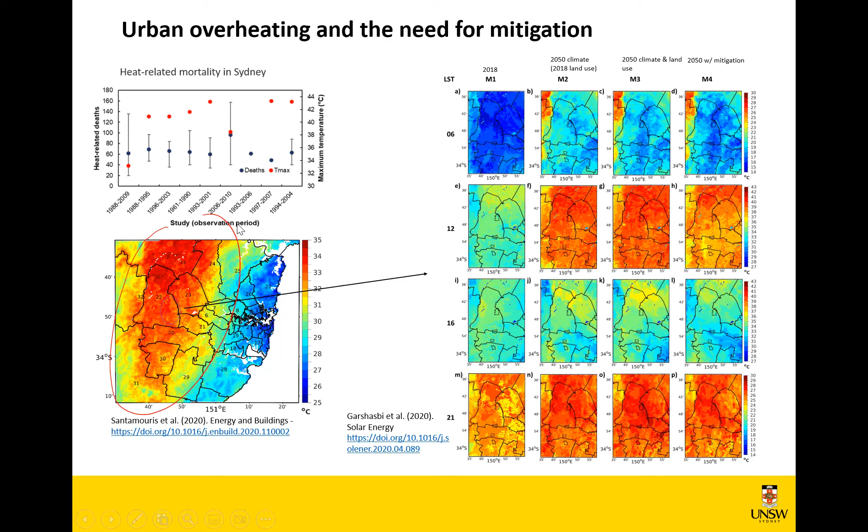So, for instance, in Sydney, in the Western Sydney area, and in the long run, we will have increasing nighttime temperatures as well, even in Australian cities. So we need to address this problem and find and implement a solution.

A lot of science has been developed, as we saw in previous webinars, so now we have to put it in place. We're all familiar with the building energy performance gap: we think a building will be zero energy or will have a low energy consumption, and there's a sharp difference between expectation and reality. We have a very low predicted energy consumption, but then the real energy consumption is much higher.

Why? Because of geometry, because of physical properties, because of the user's behavior, because of how we represent the physical processes, whether we produce the prediction with an unsuited model. A lot has been done in that realm, and we have a lot of information from post-occupancy evaluations in buildings.

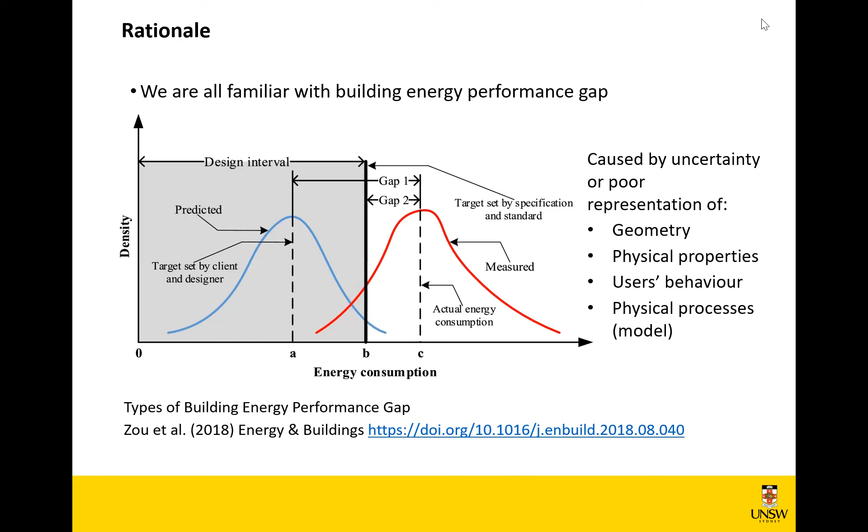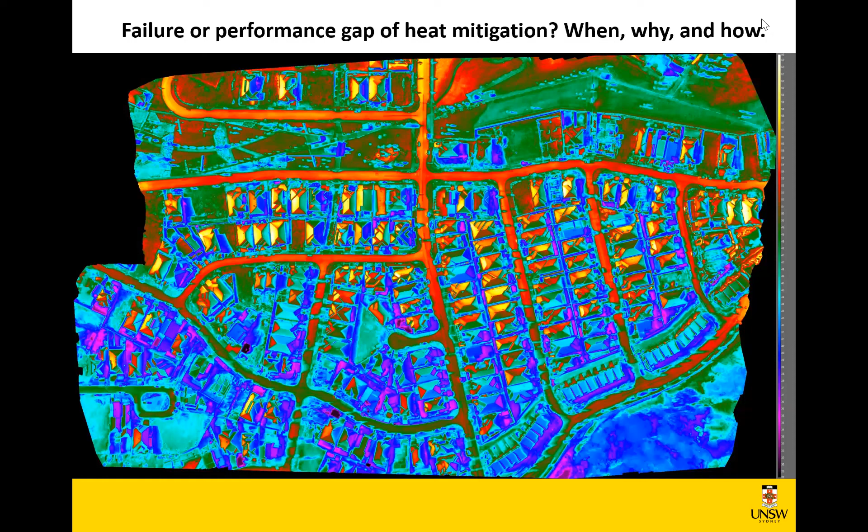It is not so when it comes to urban overheating mitigation, for the simple reason that we don't have many large-scale implementations of heat mitigation, and therefore there's not enough post-occupancy evaluation. But there is something, and it is very similar: we have issues concerning geometry, physical properties, user behavior, and representation in modeling that lead us to a change in the estimation that we have. This is the scope of this talk, to address when, why, and how.

So it's worth naming and recalling the heat mitigation technologies. We have cool surfaces, namely surfaces having high albedo or high solar reflectance and high thermal emittance. These include cool roofs, cool walls, and cool pavements.

Then we have greenery, with street trees, urban parks, and green building envelopes, so green roofs and walls. And then we have water-based technologies: water fountains, ponds, misting, and street watering, and also the reduction of anthropogenic heat emissions.

So in this talk, I will focus mostly on performance gaps in the first two, because for water-based technologies, mostly the problem is clogging of the nozzles or more mechanical things. Of course, on top of these technologies, we have combinations of green and blue infrastructure, and so on and so forth.

The best combinations at the regional scale, when we implement these at regional scale, can deliver 2 to 3 degrees of temperature reduction maximum.

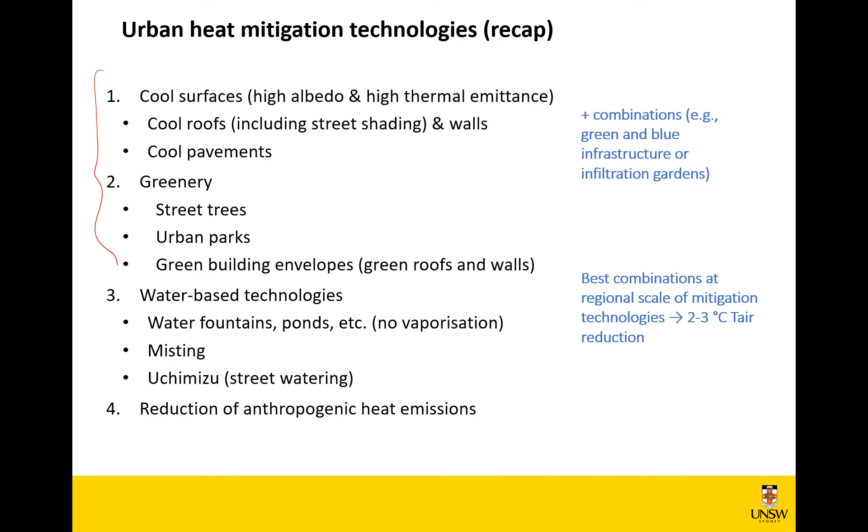For instance, in Sydney, we saw a maximum of 2.9 degrees with a citywide application, across the whole greater Sydney area, with application of cool materials and irrigated greenery.

But the average reported in literature, from a review published a few years ago, was close to 2 degrees in peak reduction, and of course it's not even across the area, as Matt has shown in previous webinars.

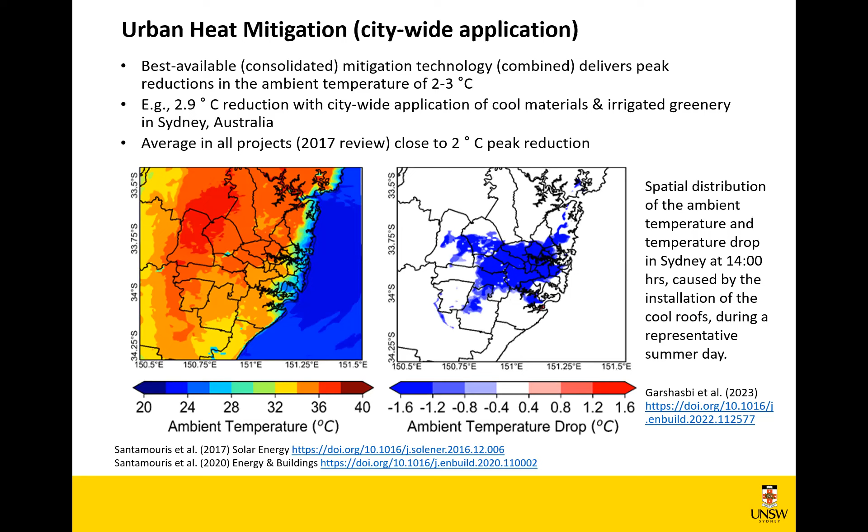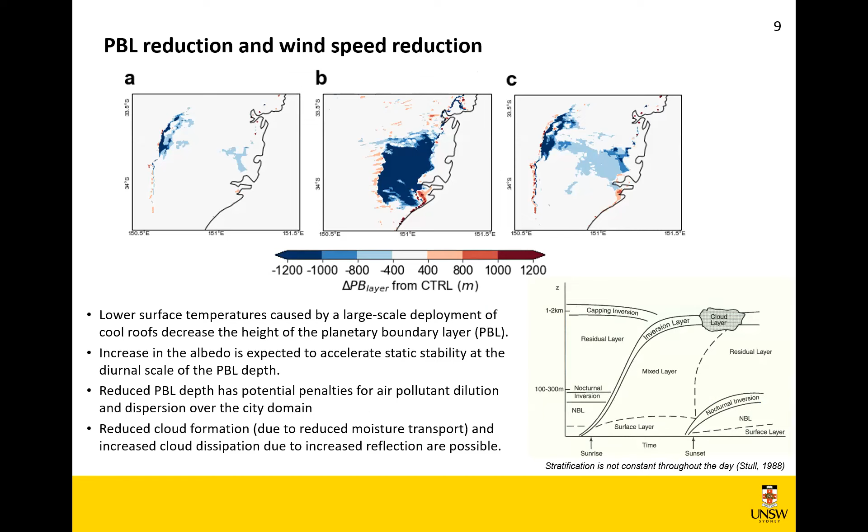Another important thing to recall is that when we implement heat mitigation, we also change the planetary boundary layer. Because we are reducing the surface temperatures, for instance on the roofing and in the city, we have less turbulent sensible heat, less convection, and therefore we are sucking in less hot air from the surrounding. So it is a very complex phenomenon.

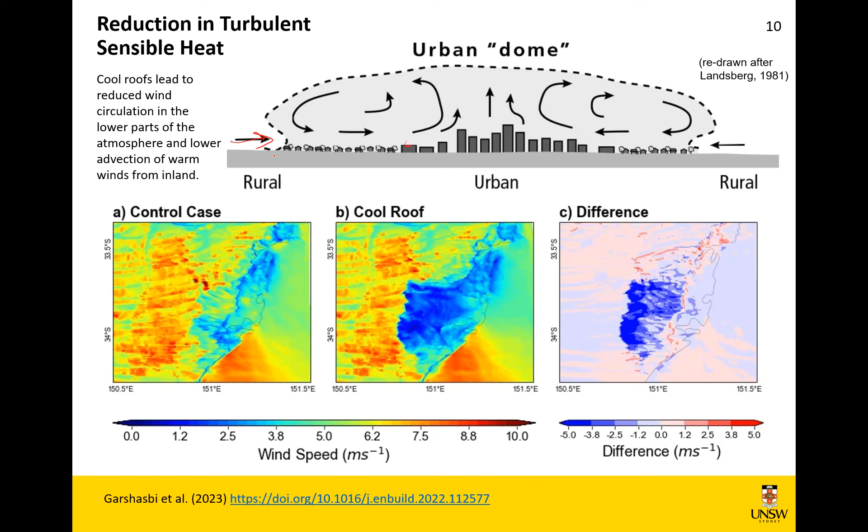This is to say that the performance of heat mitigation interacts with the climate, and therefore we have to consider them all together. This was a recap about mitigation.

What is a recap about adaptation? So we have emergency management plans, with GPs, civil protection, and volunteers visiting vulnerable populations. This was the response in Europe right after the 2003 heat wave.

That was the first response, followed by further responses in the following heat waves. Then heat wave shelters, or cool centers as they're called in Australia, energy curtailment for non-essential services, and then having air conditioning in buildings, including heat wave shelters. Then we have some semi-active approaches with air movement, and also passive buildings, so adapting to embrace the impact.

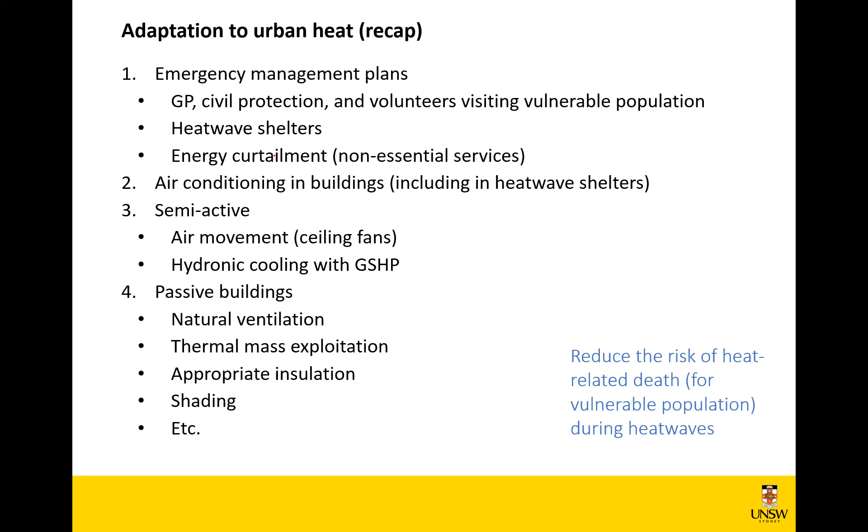And here we see what are these aspects of performance gap. We will try to have a look at them one by one. So the first one is the planning stage.

At the planning stage, we might consider more flat roof surface than is actually available, because we have a lot of pitched roofs, allowing for lower albedo because of color zoning, for instance, because we have HVAC, so we have a lot of machines on rooftops, and we have a lot of PV. That therefore reduces the area available for cool roof deployment.

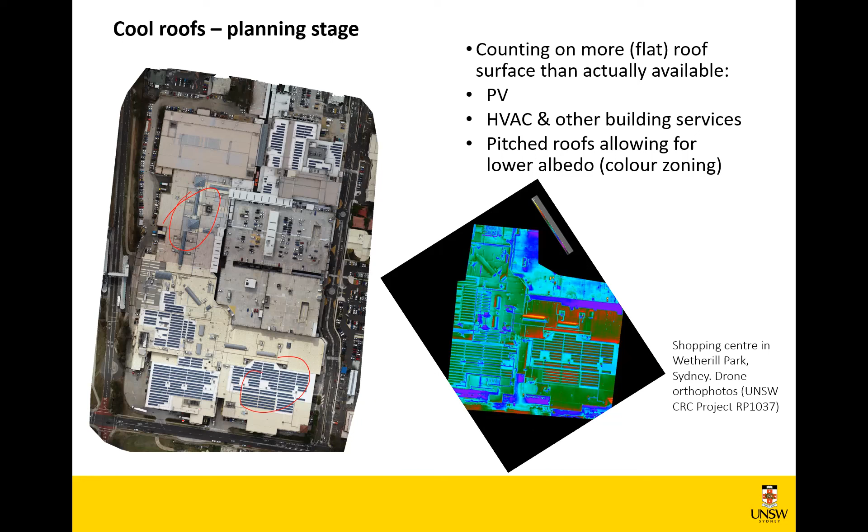And to know this, of course, we need geographic data. We need that information from inventories, and this is not all available. It's nearly impossible to have an understanding of how much area of a rooftop is occupied by machinery—might be cooling towers, air cooled chillers, pumps, sprinkler tanks, or anything—and how much instead is covered by roof sheeting. So we have two starkly different situations, and we do not have the information from general inventories.

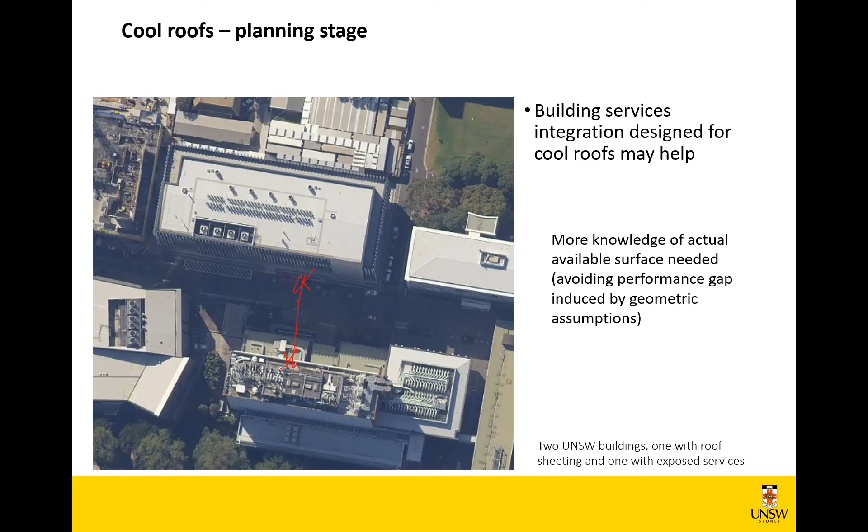So this is one of the roadblocks to having an understanding of the actual performance of heat mitigation when it comes to implementation. So we need more geometric knowledge, and also an understanding in design that can favor the application of building services integration, the design of building services integration, so that the implementation of heat mitigation technologies is viable.

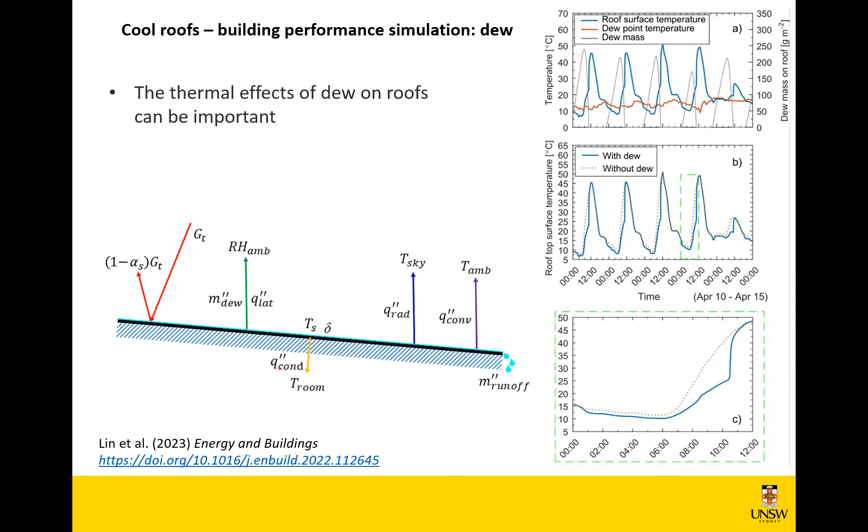Another aspect concerning modeling is the fact that, as yet, most standard building energy simulation engines and also mesoscale modeling do not consider the effects of dew on roofing. Especially for cool roofing, we have formation of dew, so condensation on the rooftop, and therefore in the early morning a phase change occurs with the evaporation of the dew, which the standard models we currently use do not represent. This might lead also to a performance gap in the estimation, as we have the performance gap for buildings.

One of the biggest factors leading to a performance gap in the field is the loss in solar reflectance due to aging, which is predominantly due to the deposition of soot, also known as black carbon, on rooftop surfaces.

This can have very important effects, and it has to be assessed in the field, on real buildings, with natural exposure. We do have methods for accelerated aging to mimic and reproduce the effect of outdoor aging on roofing and facade materials, but not all aspects can be represented.

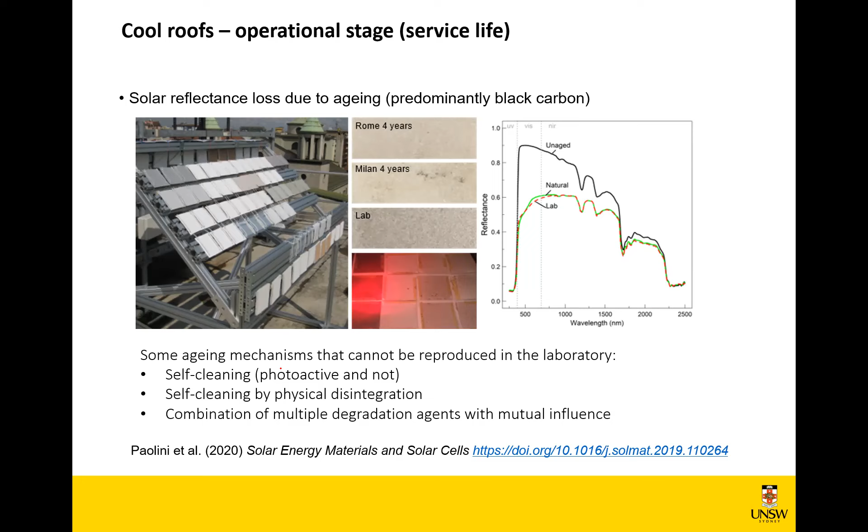For instance, self-cleaning, when it comes to photoactive materials or fluorocarbon materials, and physical disintegration—fake self-cleaning, where it appears clean but the material is actually disintegrating, restoring the initial reflectance because chunks or flakes are falling off. Or when we have a combination of multiple degradation agents with mutual influence on the effects.

Here we see a couple of examples. This is a waterproofing membrane, polyolefin, exposed for 3 years in Milan, Italy, without biological growth. On the right-hand side, with biological growth—and we see the difference that laboratory exposure cannot represent.

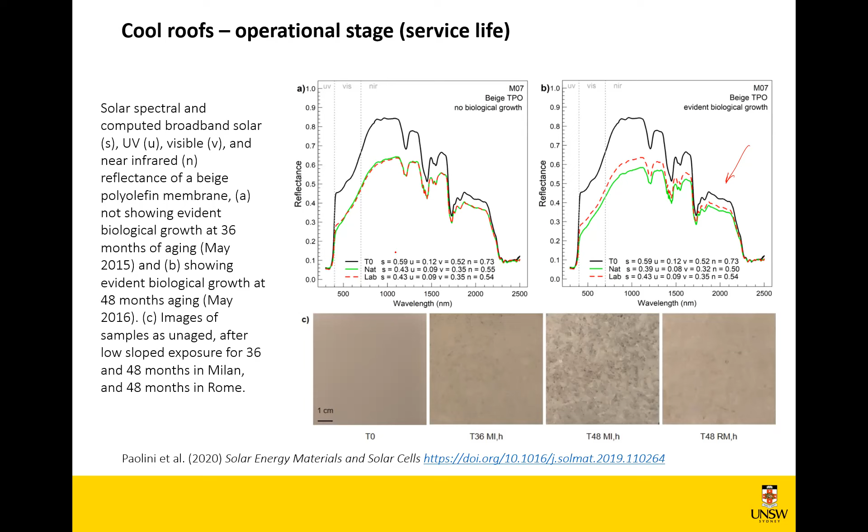However, the important bit here is the substantial loss in reflectance across the spectrum, a symptom that it's due to black carbon. The losses are quite substantial in European urban areas. This is the only study where the exposure has been performed in urban areas.

If we have an initial solar reflectance of a roof equal to 80%, after 4 years it drops to 53% in Milan and 63% in Rome, with an average of 58% stable solar reflectance. So the loss is quite substantial—not something we can forget about when it comes to implementation.

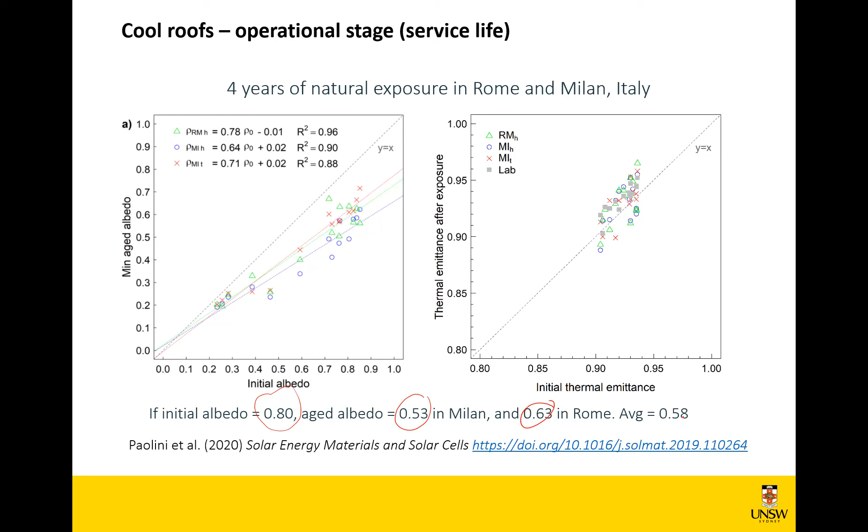I mentioned that was the only study performed in urban areas. There are few such studies for the simple reason that land use is expensive, and when it comes to deploying an exposure farm for testing materials, that is definitely a factor. In the US, this is the first, most relevant program that started with industrial testing, conducted by the Cool Roof Rating Council.

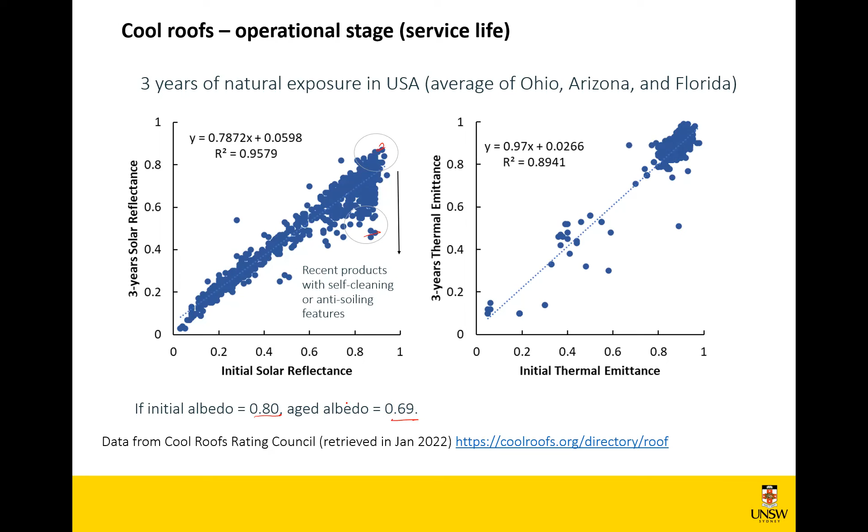Instead, there are also some materials that don't feel the effect very much—they're almost unaffected by aging, so there are some promising results. However, on average, if the initial albedo is 80%, the aged albedo, even here, is 70%, even in those non-urban sites.

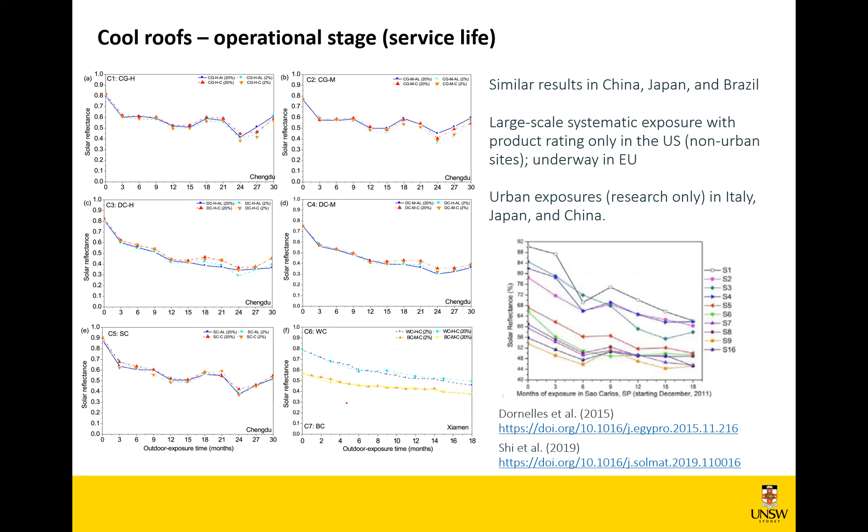These are two of the main programs. There's some other evidence from China, Japan, and Brazil, with more or less the same trends, though values differ because every site is different. For people listening from Australia, we don't have anything in Australia at the moment—this is a freshly published review from just a couple of days ago.

Most of the studies are experimental studies. The only program involving industry that's continuously run is the one in the United States. There's one being implemented by the European Cool Roofs Council, which is at a good stage, but not yet in full operation.

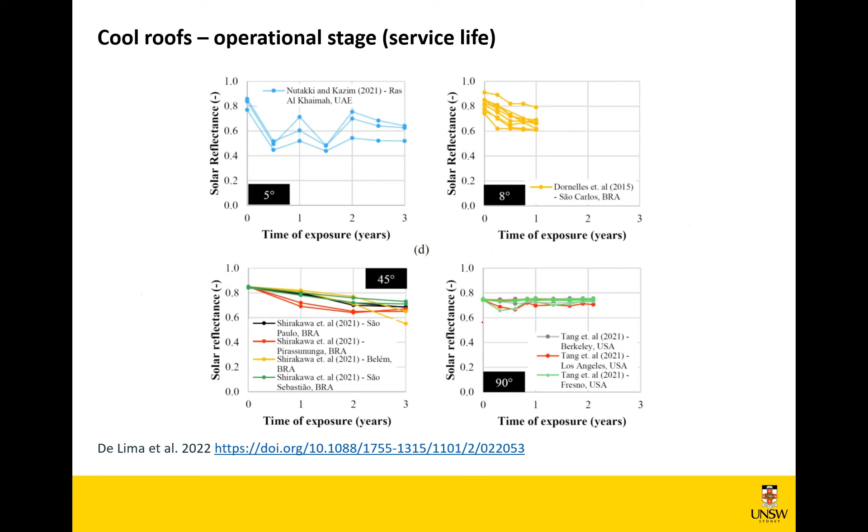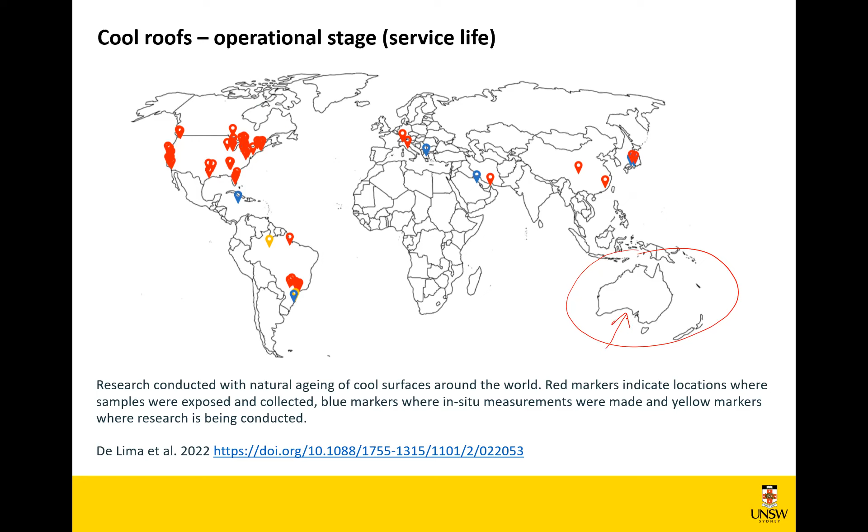Here again, some other examples—as you can see, it changes radically from site to site, even for the same initial solar reflectance, because it largely depends on the product but also on the environmental conditions. This means that if we don't have information here, we cannot take information from elsewhere, so we cannot just run a computer simulation—we need experimental data.

What are the effects of a loss in solar reflectance? Surface temperatures increase radically. So if we have a new roofing membrane with an initial solar reflectance of 80% and an aged solar reflectance of 56%, we see a substantial increase from 32 to 53 degrees over thermal insulation.

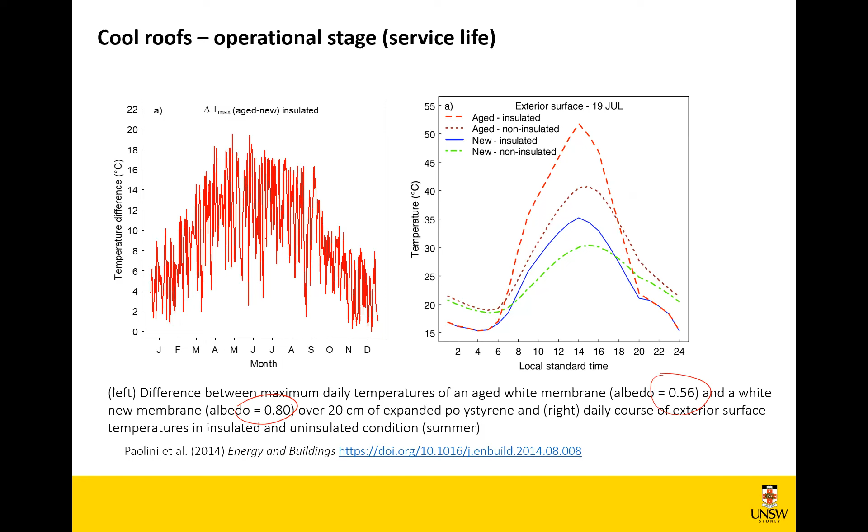Every day the maximum surface temperature is higher for the aged membrane than for the unaged membrane, and the difference is substantial. Even 20 degrees, consistently 20 degrees hotter during the summer. So it's not just a single day.

So what is the impact on urban heat mitigation? There's no specific study on the impact of soiling or performance loss on urban heat mitigation. However, it's quickly done because temperature reductions due to urban heat mitigation are usually linear with albedo. When it comes to albedo with greenery and latent heat exchanges, there's a strong deviation from linearity. But for albedo, it's somewhat linear, not perfectly, but we can have an educated guess.

If we take results from our study that Matt presented in previous webinars, we have a conventional roof with albedo of 15% and a cool roof with albedo 85%. If we deploy the roofs across Sydney, we have a maximum peak reduction of a couple of degrees. Therefore, if we have an albedo loss of 20%, like we saw in the previous papers and from experimental results, let's say from 80% to 60% in solar reflectance, we have a loss in mitigation of approximately 0.6 to 0.7 degrees.

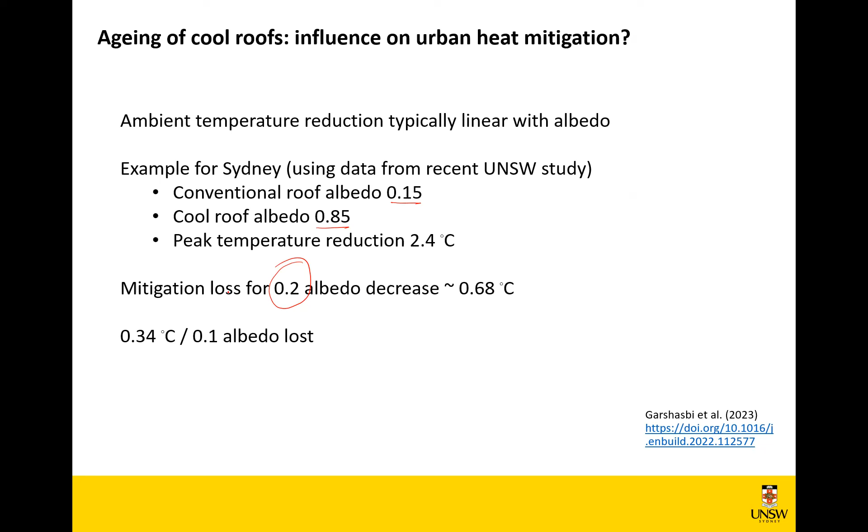Or in other terms, we lose 0.3 degrees in mitigation for every 10% of solar reflectance lost due to aging of materials. That was for roofing.

What happens to cool walls? We have less information available than for cool roofs, and also a lot of uncertainty due to the window-to-wall ratios across urban environments. Natural exposure programs are more recent. There's one program just started in the US, but there's nothing underway anywhere else.

Only research campaigns, as the one shown here, where the initial solar reflectance was 75%, and after 4 years it was 55%. Aging takes longer for walls because the deposition is typically longer.

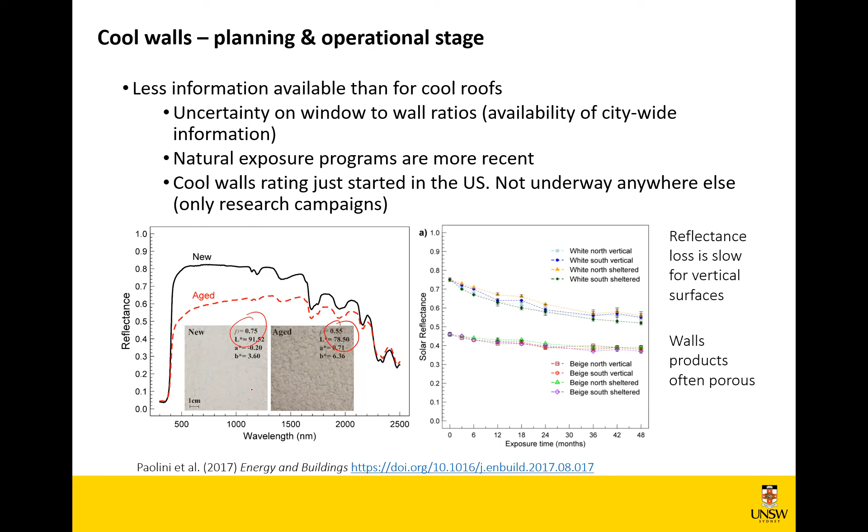Again, if we have self-cleaning, we need to run a longer campaign because it's not forever. For walls, especially due to the visual impacts and influence on aesthetics, self-cleaning is one of the areas where it's been implemented the most. However, after aging, the self-cleaning performance decreases because the titanium dioxide, the technique used to achieve self-cleaning, gets deactivated due to clogging of the pores or alteration of the structure of anatase, and it's not that effective anymore. After cleaning, it recovers a little bit of the initial performance, but not all of it.

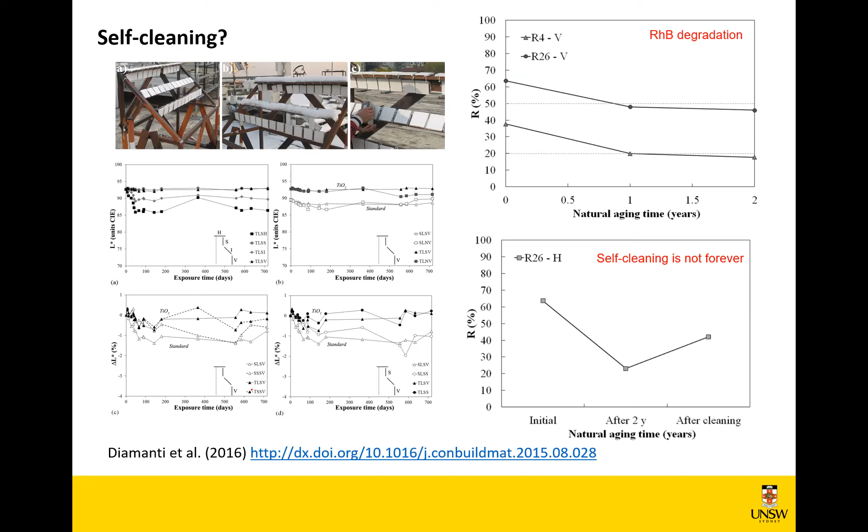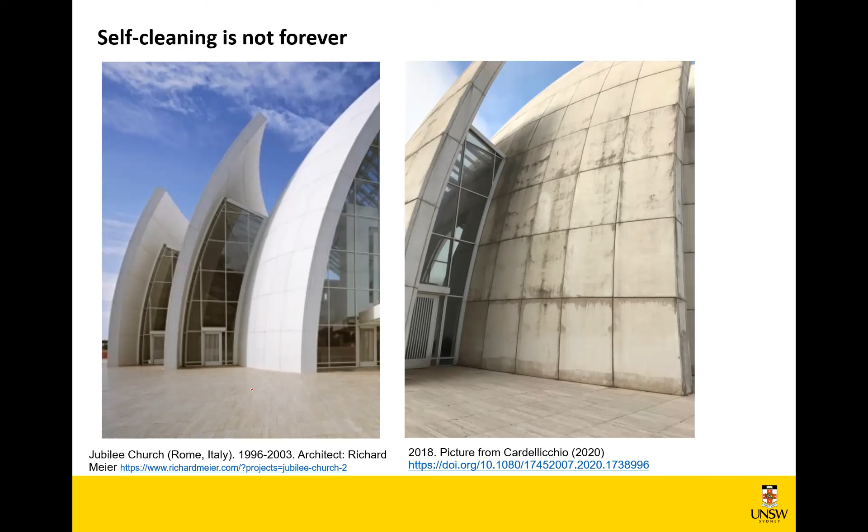That was from an exposure campaign we ran for a couple of years in Italy. Here you can see the effect. This is the Jubilee Church in Rome that was commissioned in 2003. In 2018, on the right-hand side, you see the effect, because it was not self-cleaning anymore, and it was subject to major degradation.

Also, when it comes to flat roofing, natural exposure programs are quite representative. It's different when it comes to wall surfaces, where the morphology of the facade plays a major role, as you can see here, because it induces differential rain wash, and therefore a substantial difference in the patterns of areas that get rain washed and that can get cleaned by rain.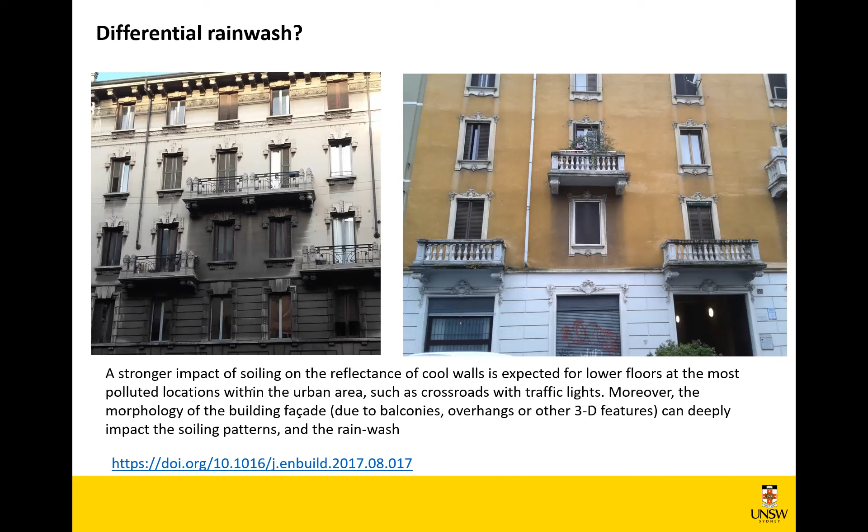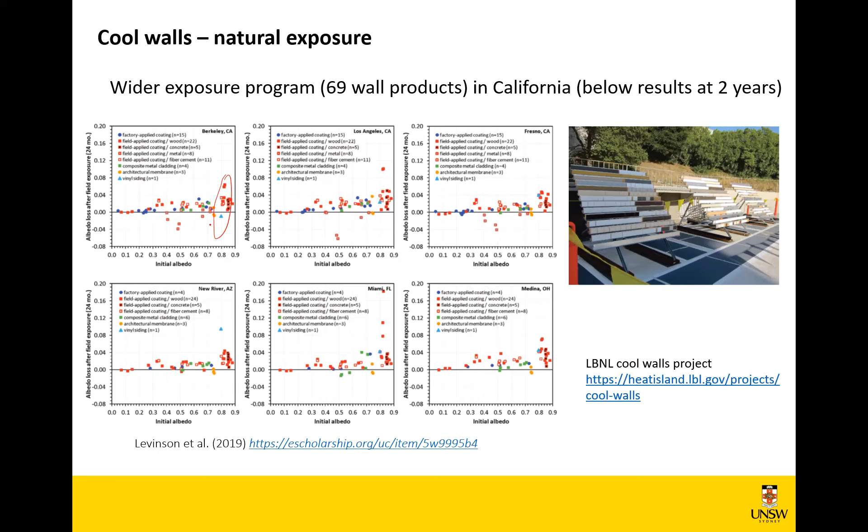As I said, there's one program that has started in the US, but only a couple of years have been tested, because the exposure program runs for 5 years, since for walls the exposure and aging process is slower, and you get to a stable value in more time. But again, similar results with initial albedo: if we take just the products exposed with a high initial albedo, we see losses after a couple of years that are in line with the study I referred to before with the natural exposure in Italy.

Same story. So what happens for urban heat mitigation? Here we have an example from LA for per 0.1, so 10% wall albedo increase. Cool walls can reduce summer daily average canyon air temperature by 0.05 degrees, and the peak temperature close to 0.1 degree per 0.1 increase in wall albedo. Therefore, again, we have a mitigation loss of 0.1 to 0.2 Celsius degrees for each 0.2 albedo decrease for the walls.

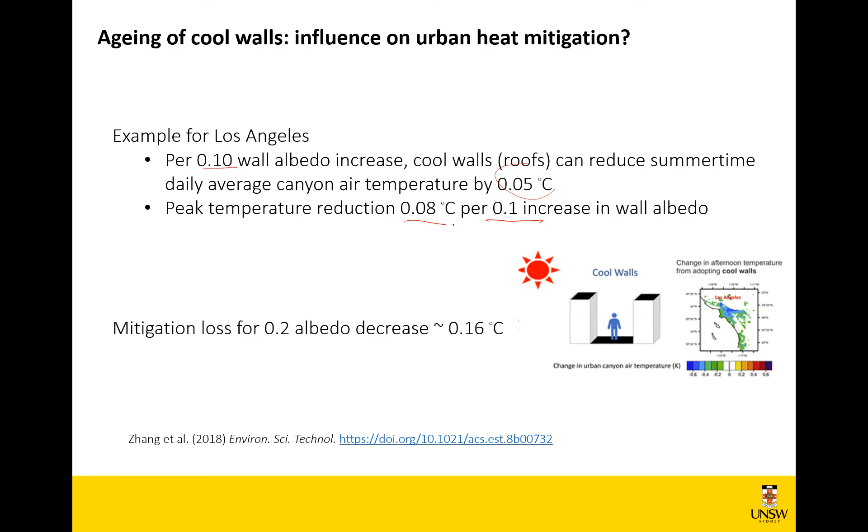For cool pavements, there's no extensive campaign, only a few papers. The reason is, of course, you cannot expose the pavement on roof racks and forget about them for a couple of years and then test them again. You need to measure them in the field, because what leads to the aging of cool pavements is the torque of the tires, the oil dropped by engines, the overall pollution in the city, and the wear and tear.

When it comes to cool pavements, there's no general and widespread natural exposure program, only isolated measurements on single implementations and very few papers. Aging might reduce the mitigation potential by 25 to 50%.

In these papers, we have reflectance dropping from 0.47 to 0.40, or from 0.26 to 0.15. So again, it's less pronounced, because it starts from a lower reflectance point, but it's still relevant.

There's an ongoing study by ASU in Phoenix showing reflectance dropping from about 0.35 to about 0.2 in 7 months.

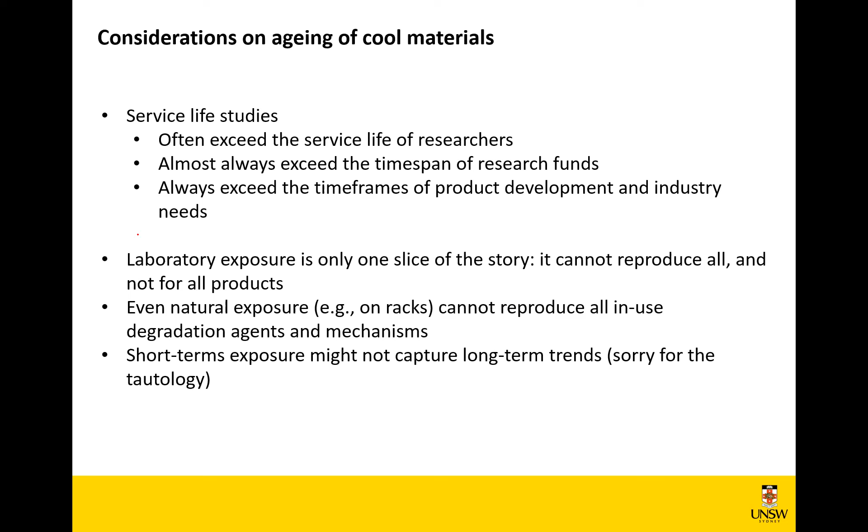Laboratory exposure is also only one slice of the story, it can't reproduce everything. So we need data from the field, which brings us to trees.

Trees mitigate the urban environment by reflecting a little bit of sunlight from the top of the crown, mostly, and then a lot by shading the street pavements. If we have a solar absorptive street pavement, say 5% reflectance, we are reducing the amount of sunlight that gets to it, which therefore reaches a lower surface temperature. The important factors are, of course, transpiration from the plants and evaporation from the soil.

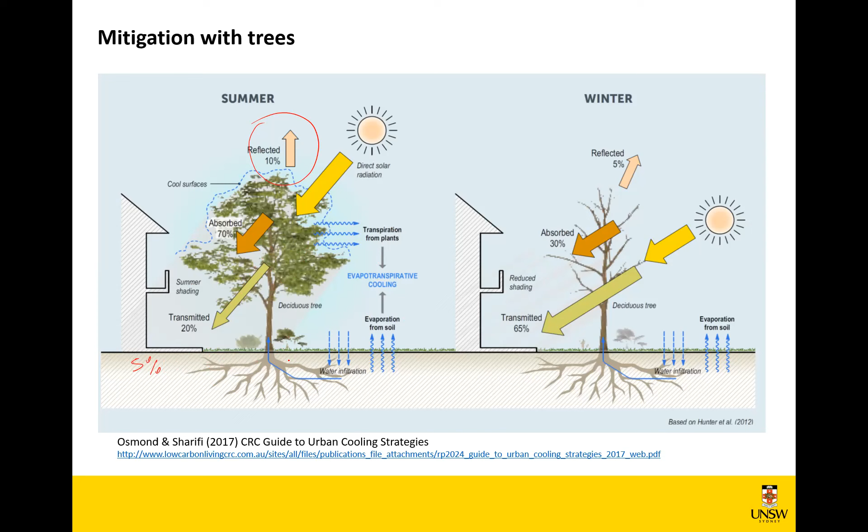So what do we get in terms of heat mitigation when using trees? About 1.2 to 1.5 degrees. However, with greenery combined with a reflective material, we get a peak reduction of a couple of degrees, around 2.3.

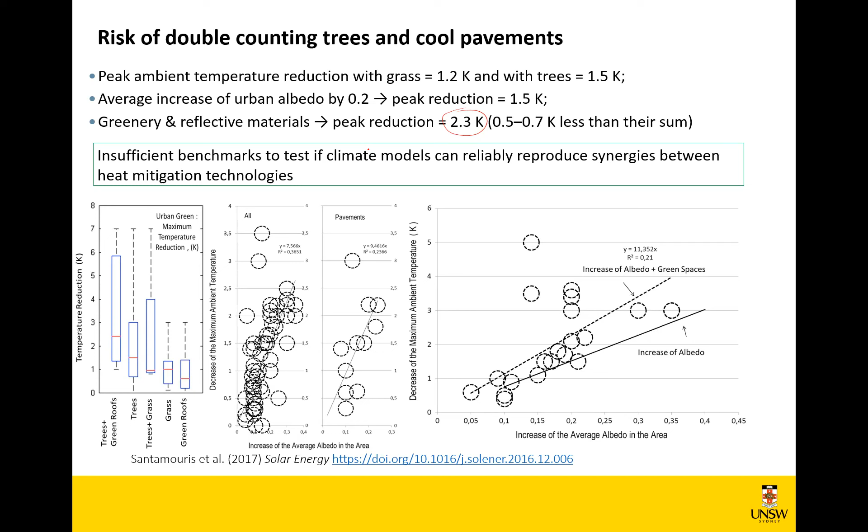However, we did not have enough benchmarks to test if climate models can reliably reproduce the synergies between heat mitigation technologies. This is still one of the areas where there's science to be developed, and we need to improve the performance of models to prevent performance gaps and underestimation or overestimation of the effects.

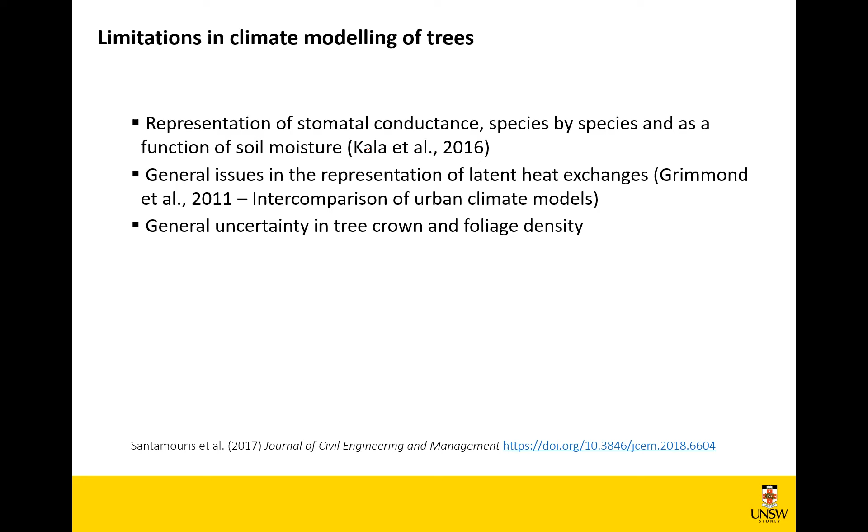Some of the limitations of climate modeling practice when it comes to trees include the representation of stomatal conductance and the general representation of latent heat exchanges, plus overall uncertainty in tree crown and foliage density, which is almost an unsolvable issue, because we will never know the real transmissivity of the crowns for every single tree we have around, and this is just for a tree in a single moment in time.

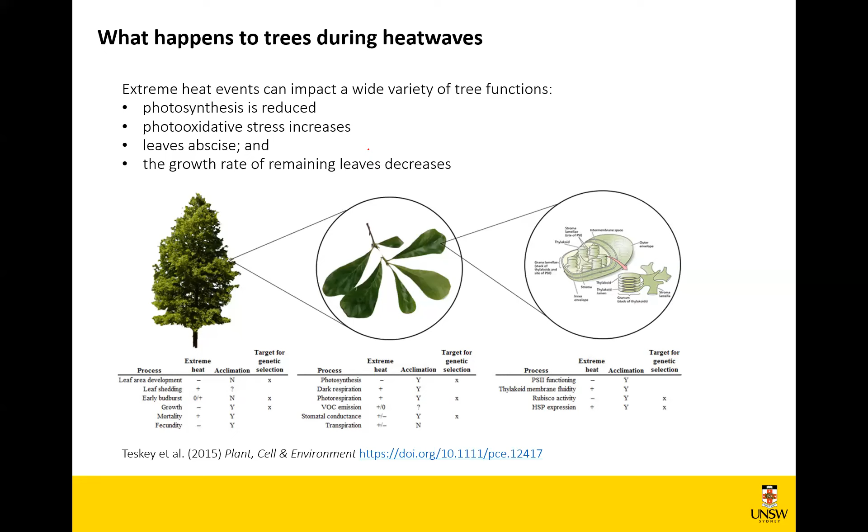When we move to heat stress conditions during heat waves, we have reduced photosynthesis, an increase in photooxidative stress, leaves get dropped by the trees, and also a decrease in the growth rate of the remaining leaves.

Researchers performed an experiment putting trees fundamentally in an oven in a climate chamber, exposing them for different durations of time at different temperatures. With very high temperatures, even a very short exposure of less than 20 minutes can cause a loss of foliage by more than 50%.

Those are not unheard of temperatures, especially in Western Sydney, where for a few hours a year we reach 45 degrees or even 50 degrees in some areas, and it will be more and more frequent in the future. So information on the performance and sensitivity of greenery to extreme heat will be vital to understand whether there will be widespread failure of green infrastructure during an extreme heat event or not.

We're not talking, again like for the curves, about drops in performance by 20% or more. Here, likewise, we're not talking about 1%, 2%, who cares. No, we're talking about something qualitatively different.

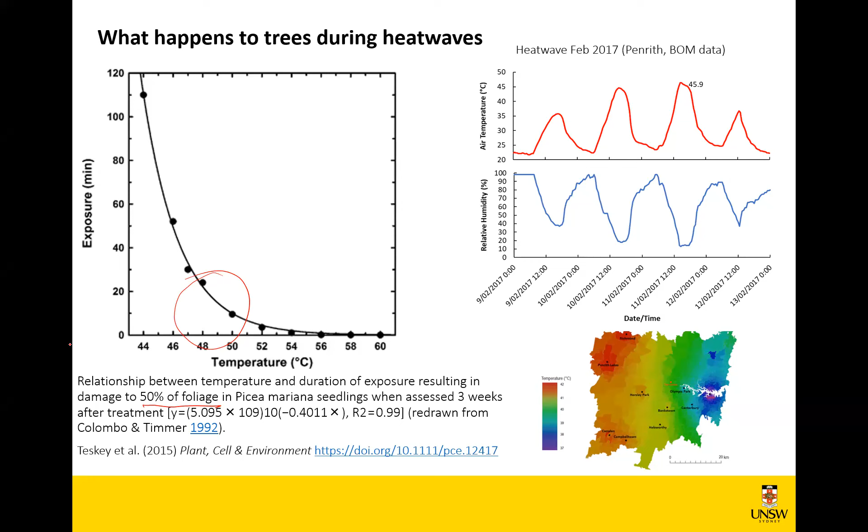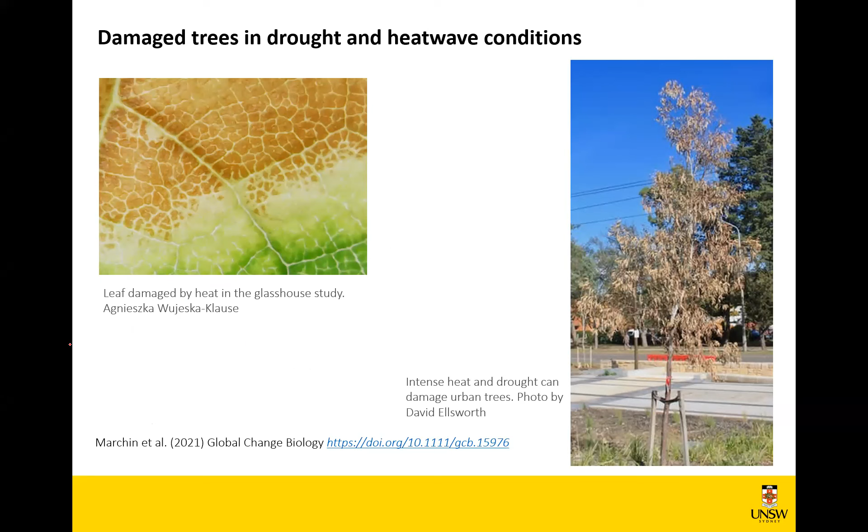We can also observe in the field the effects of drought and heat wave conditions on trees, leading to foliage damage. They drop their leaves, so they fundamentally behave like in winter—they're not providing shading anymore, or the shading is greatly reduced.

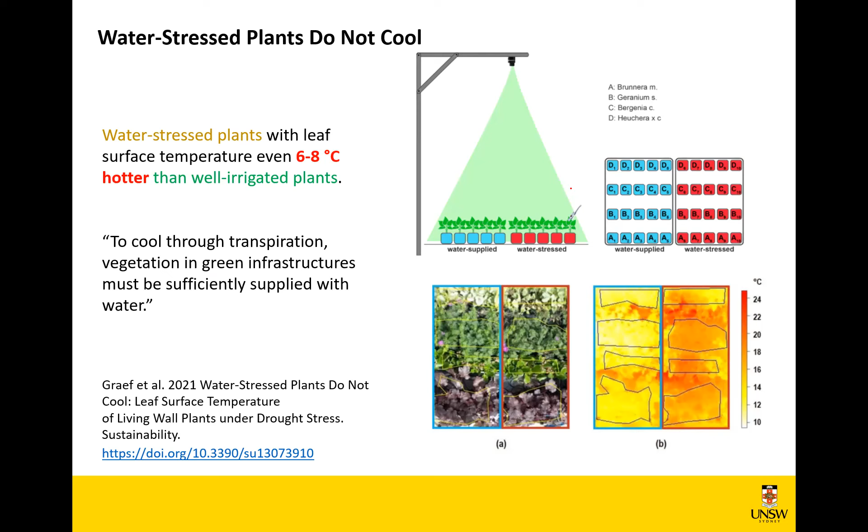Water stressed plants do not cool effectively because they have leaf surface temperatures even 6 to 8 degrees hotter than well-irrigated plants, and the overall transpiration is greatly impaired.

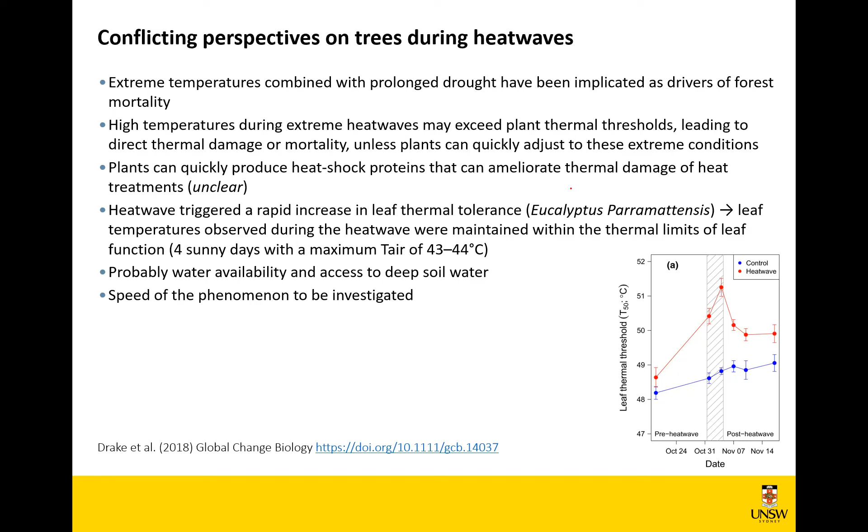In general, when it comes to trees during heat waves, there are some conflicting perspectives. This is one of the areas where a lot of the science is moving. Some species produce a reaction that can contrast the thermal damage of extreme heat—this is unclear in the literature, and there appears to be some sort of adaptation. However, the dynamic of these adaptation phenomena is still being investigated.

What we know is that if the extreme heat is sudden and the species do not have time to adapt, we see a dropping of the leaves, and without irrigation, the mitigation performance is greatly reduced. Here I'm showing climate modeling considering irrigated and non-irrigated trees.

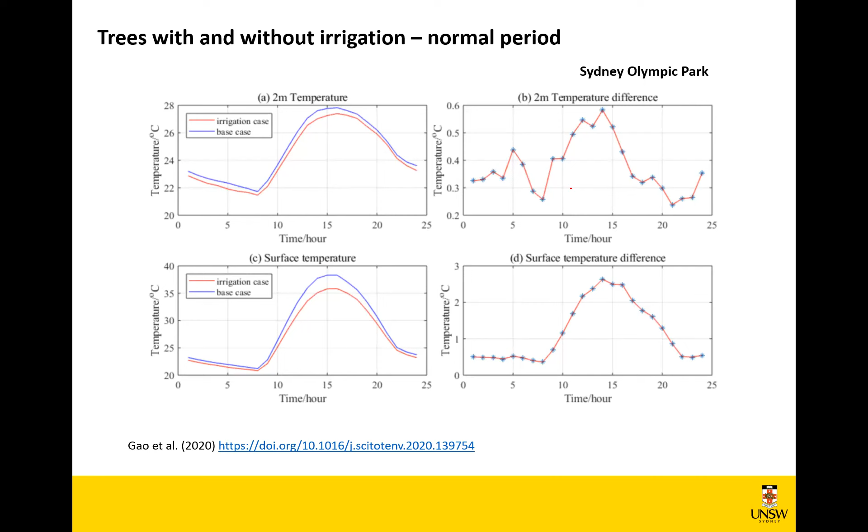In a normal situation, with a temperature difference measured at 2 meters height, non-irrigated trees show air temperatures 0.5 to 0.6 degrees higher during a normal summer period. But during a heat wave, the difference exceeds 1 degree for several hours during the daytime.

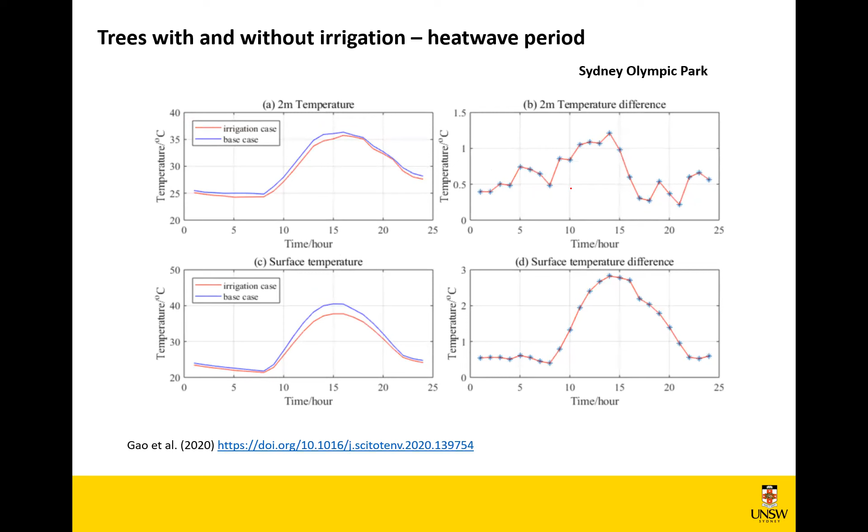So the maximum temperature decrease caused by irrigation is 1.2 degrees, but if we have drought and no irrigation, we see a substantial performance loss.

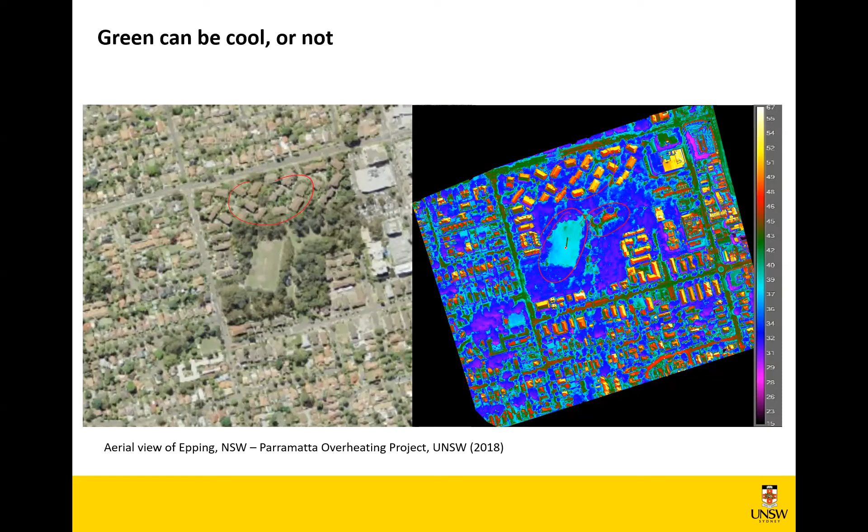Here we can see a practical example from a field campaign supported by the City of Parramatta that we ran a few years ago. We see a sports field, well irrigated, very cool, with surface temperature below 37 to 39 degrees. Instead, here we see some roofs that are hot—some dark and solar absorptive—but also a portion of grass and greenery that is very hot because it's non-irrigated and depleted, and it can be as hot as concrete.

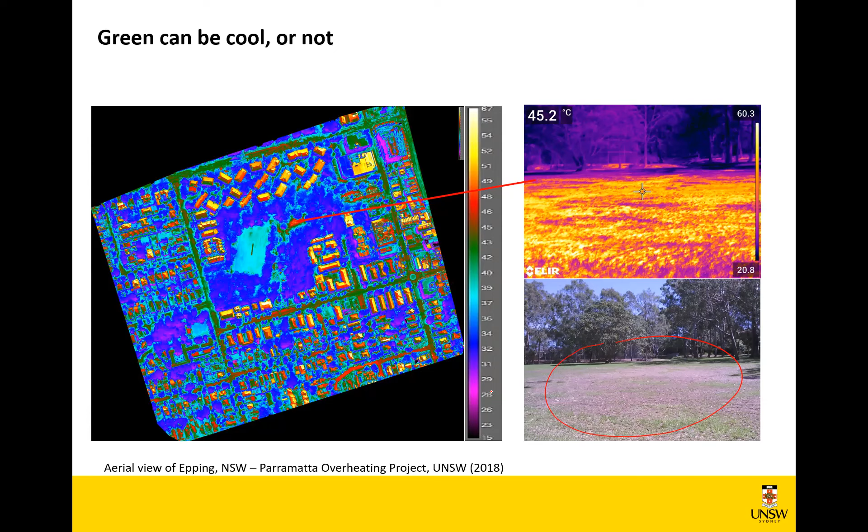So if we mitigate with this technology, or with cool materials or greenery, but do not care about the performance of the materials we're selecting, and do not care about the quality, performance, and maintenance of greenery, it is futile. And likewise it happens for green roofing.

This is one of the reasons why it is important to have information about performance. Otherwise, if we just use LEED protocols that give one point in heat mitigation, tick, whatever the green roof is, we're missing an important aspect concerning the real performance in the field of what we are deploying.

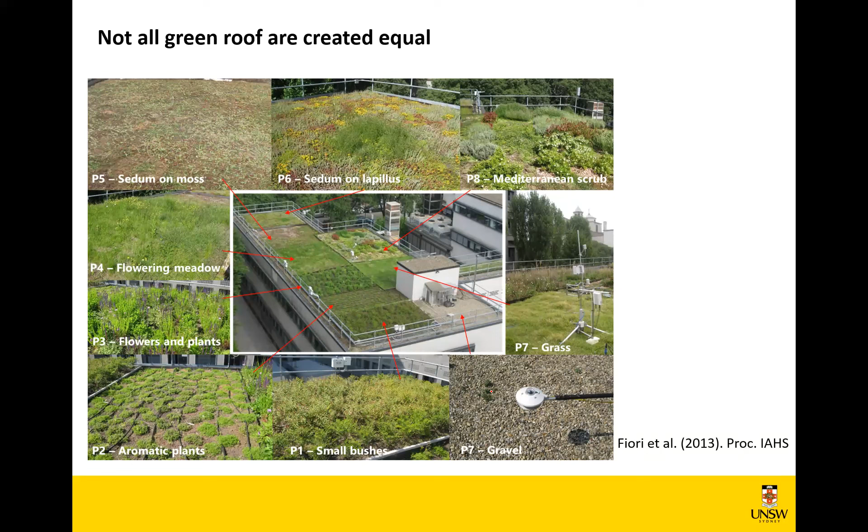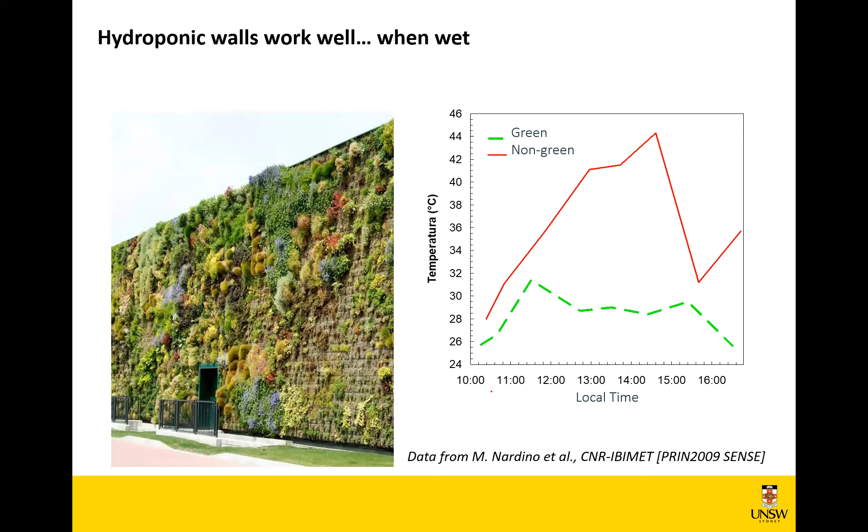Likewise, for hydroponic walls, they work well when very well irrigated. Here you see the different surface temperatures of a hydroponic wall when irrigated, compared to another wall next to it with comparable solar reflectance—lower than 0.4—which was 14 degrees higher in surface temperature. However, if we have a drop in irrigation, we have a completely different situation.

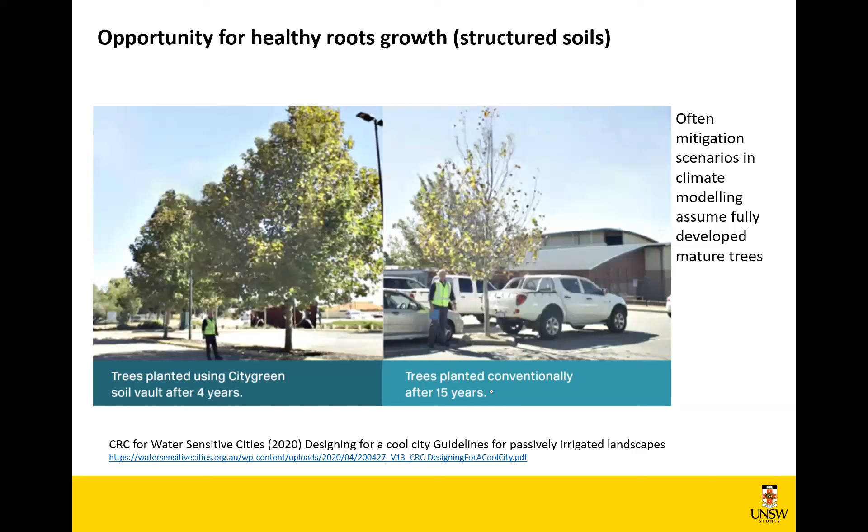One of the aspects that greatly determines the size of the crown of trees is how well they can grow, and whether they have available soil for the growth of healthy roots. If they're planted just in a car park without structured soil, like in many car parks, after 15 years it's still not providing a lot of shade. Instead, with a structural soil and a more efficient technique to allow the roots to grow well, we have a completely different performance. The difference is staggering.

They have a very different growth rate, a different size of canopy, plus all the other aspects concerning removal of pollutants and maintenance costs and so on. However, the performance in the field is largely influenced by the installation.

So we discussed cool materials, then greenery, and then I mentioned water misting. There's just some technical failure of the nozzles, which are getting clogged, therefore we're not discussing it here today.

When we have an increase in ambient temperature, the COP of all thermal machines drops, and therefore they cool the indoor temperatures less effectively, so they're less efficient. But it also means they are releasing more heat into the built environment because they are used for longer, they're running for longer, and the efficiency is greatly reduced. As a result, they fail us when we need them the most.

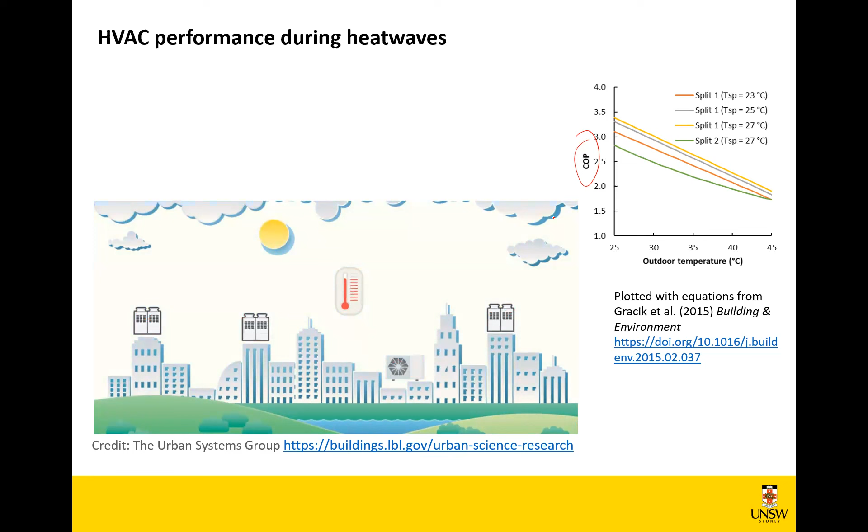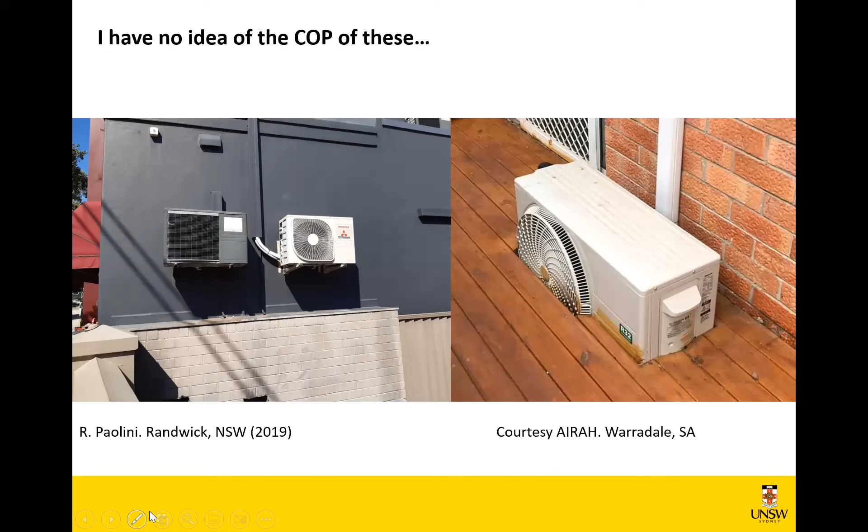Especially when they are behind louvers, it largely depends on the conditions, and also when the installation conditions are silly, like the ones we see here - these are real, not photoshopped, but some people thought it was a good idea to have this. I have no idea what the COP or EER of these might be.

So to recap on heat mitigation: with cool roofs and shade trees, we are reducing air conditioning use and therefore reducing the demand on power plants. These are the direct effects on energy. Then the indirect effects are that we are reducing outdoor temperature, mitigating the built environment, and consequently reducing pollution.

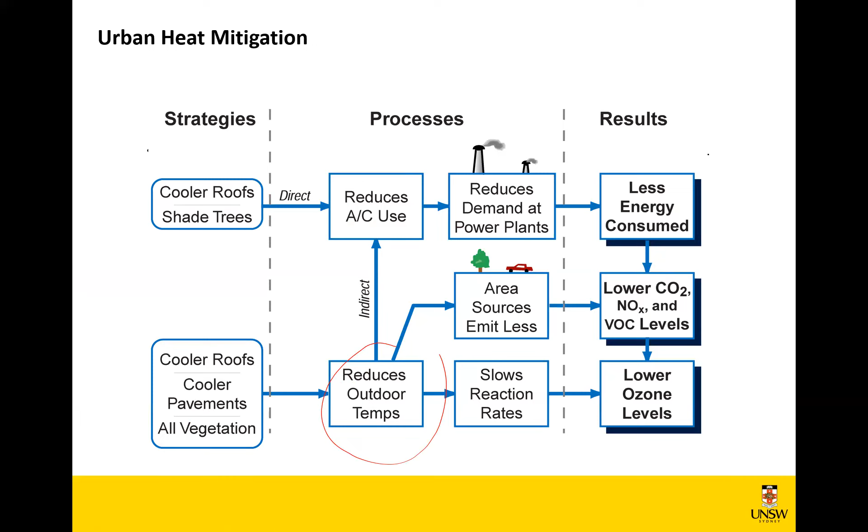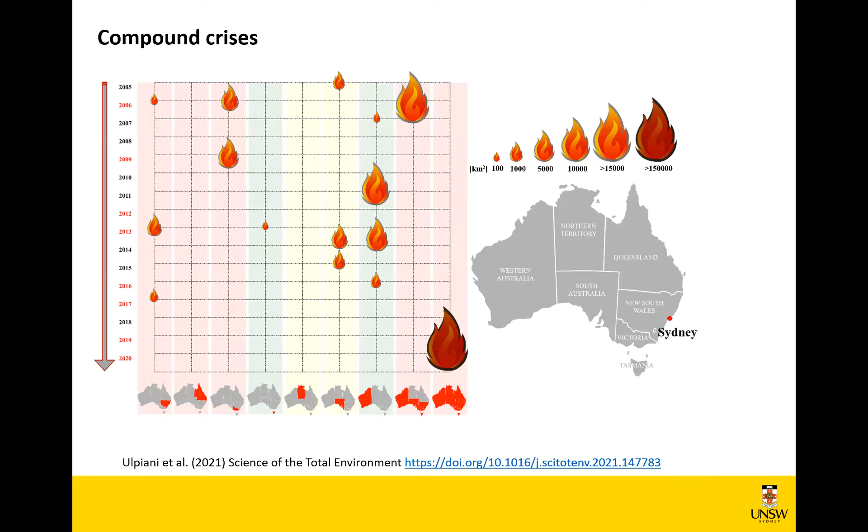We might think, what about compound crises? Will they not all fail at the same time? Well, actually, yes, we had a compound crisis - we have heat waves with bushfire. And this is one of the challenges.

So if we have drought, we have dry soil. If we have dry soil, we get bushfire. If we have bushfire, we have smoke, and it causes poor air quality, but also soot on cool roofing and soot on greenery. We cannot open the windows because of poor air quality, and we cannot use natural ventilation - this is gone. Therefore our adaptation capacity is compromised. If we have soot on roofing, our mitigation capacity is compromised.

Again, if we have dry soil, we have extreme heat. It's usually when you have extreme heat that you also have low relative humidity. We have reduced evapotranspiration, therefore the greenery is less effective. When we have extreme heat, we have higher temperatures, and the COP of HVAC drops, and the yield of photovoltaics drops. Therefore we're using more electricity from the grid, and PV is producing less electricity, meaning it's releasing more heat into the urban environment because it's transforming less sunlight into electricity and more into heat.

So because of these two factors, we have an increase in anthropogenic heat. As a result, we have increased electricity demand. So it's very much linked - it's a substantial chain of events that is difficult to predict.

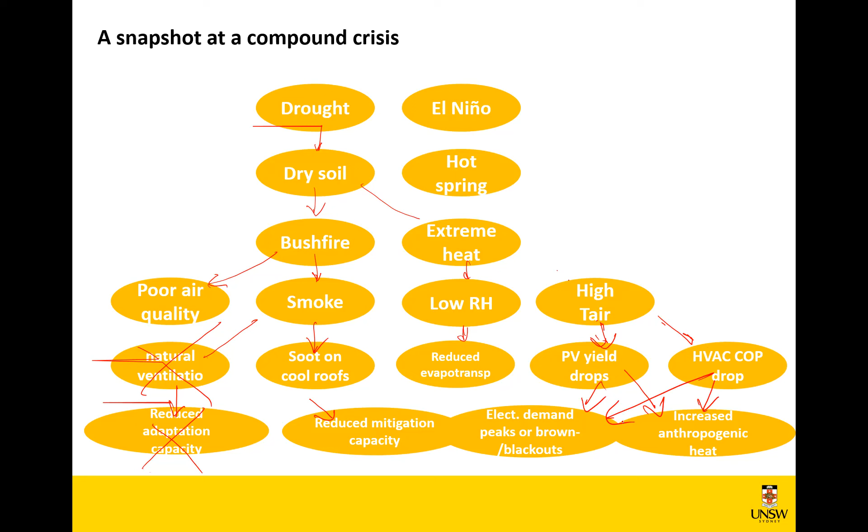Then we might say, what about flood conditions? It's not antithetic - all we said so far is not antithetic, because urban heat mitigation and the management of the other side, blue and green infrastructure, are not competitors, but should work in synergy as much as possible.

So to conclude, heat mitigation technologies suffer performance losses. They can be substantial, like any machine, like anything. They should be accounted for, and there's a need for structured data and metadata. The new generation of models should be able to represent these synergies and compound crises, because that's very important to understand what happens.

And compound crises do occur, like the cold snap in Texas in February 2021, or the bushfire season coupled with heat waves in 2020 in Australia.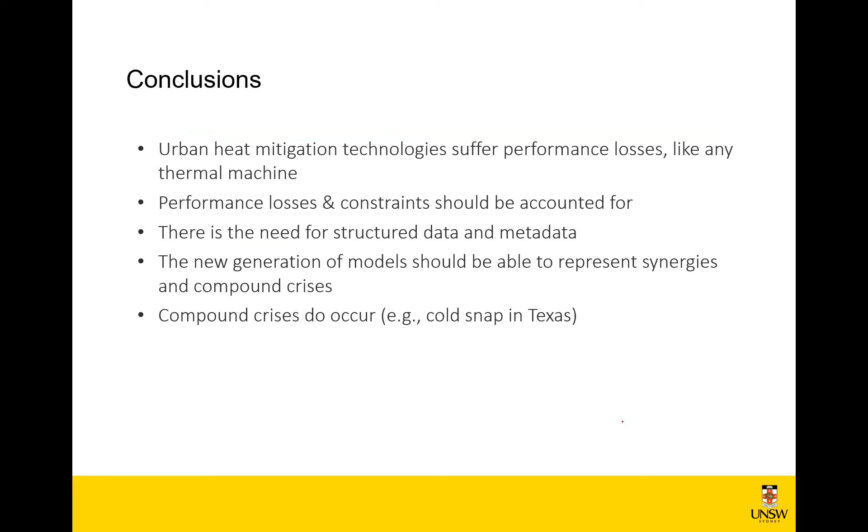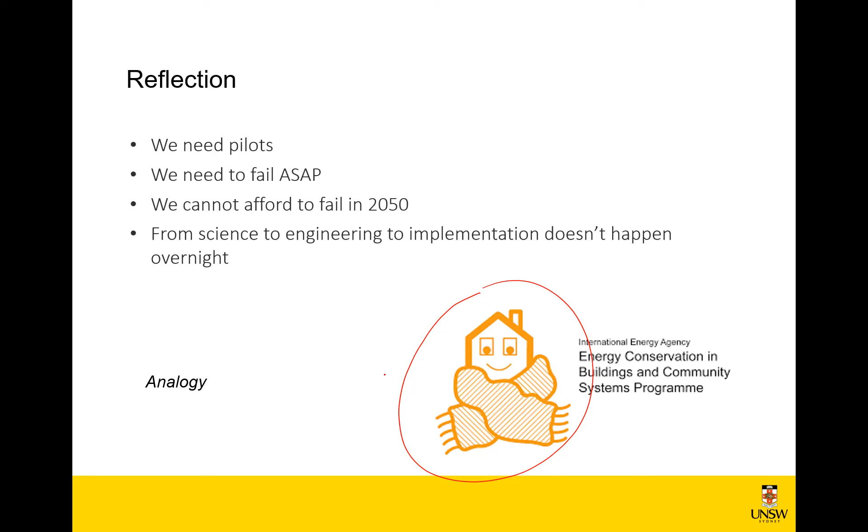However, the real implementation took some time. In the early stages of implementation, there were not controls - people were not actually putting in the thermal insulation, and there was a performance gap and so on. It took quite some time to get to actual delivered performance. So we have the science about heat mitigation, but we needed to care about the implementation.